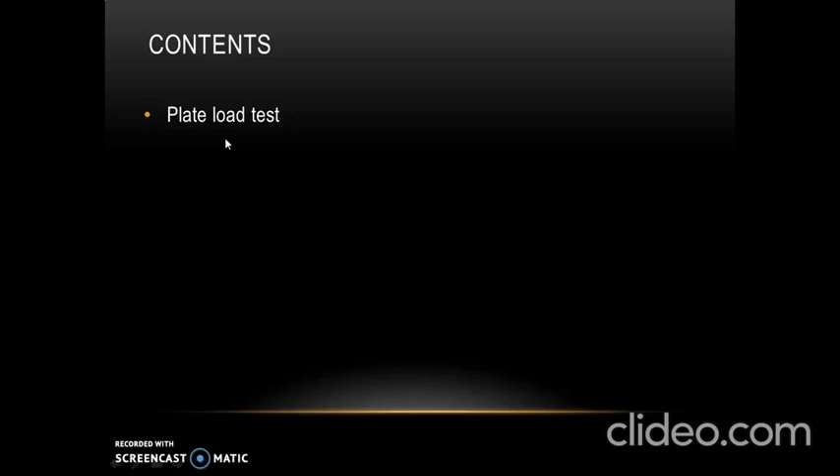In this presentation, we will learn how to find out the ultimate bearing capacity, safe bearing capacity, and also the settlement of the foundation using plate load test. Plate load test can be conducted by using gravity loading method and truss loading method.

In this figure, we can see a test bed of width 5 times BP, where BP is the width of the test plate. There are two dial gauges which are fixed on either side in order to measure the settlement of the plate. And at the center, there is an extension pipe over which a hydraulic jack is fixed in order to note down the application of pressure. Above the hydraulic jack, there is a steel girder which supports a loaded platform made up of sand

bags. Using this test, the load or pressure applied onto the plate will be noted down and the corresponding settlement will be noted with the help of the dial gauge. This is the plan for the same setup.

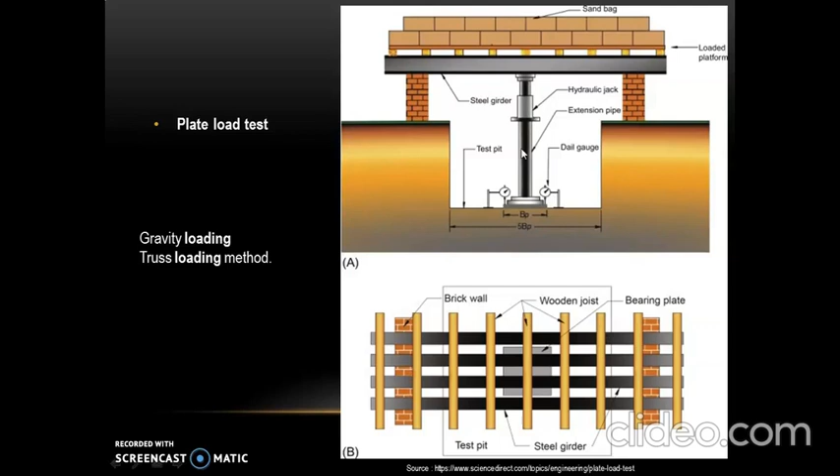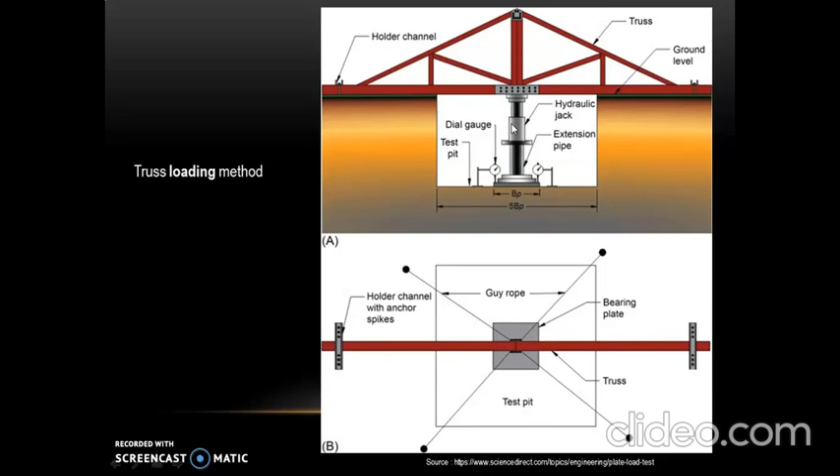Next is the truss loading method, in which instead of sandbags we can see that the truss is being used in order to apply the load. Test bed is of size 5 times BP, where BP is the width of the test plate. There are two dial gauges in order to measure the settlement. Hydraulic jack is used to apply the load. And this is the plan for the same setup.

In plate load test, a square or circular rigid plate of standard dimension, generally 300 mm square for square or 300 mm dia for circular, is placed at the foundation level and load is applied in increments. The settlement of the plate corresponding to each load increment is recorded for calculating bearing capacity of the soil.

The plate load test, which is used to determine bearing capacity and settlement, may be carried out by either using a gravity loading or truss loading method. A test pit of the same depth as the foundation and width equal to 5 times the size of the bearing plate, that is BP, is dug into the ground.

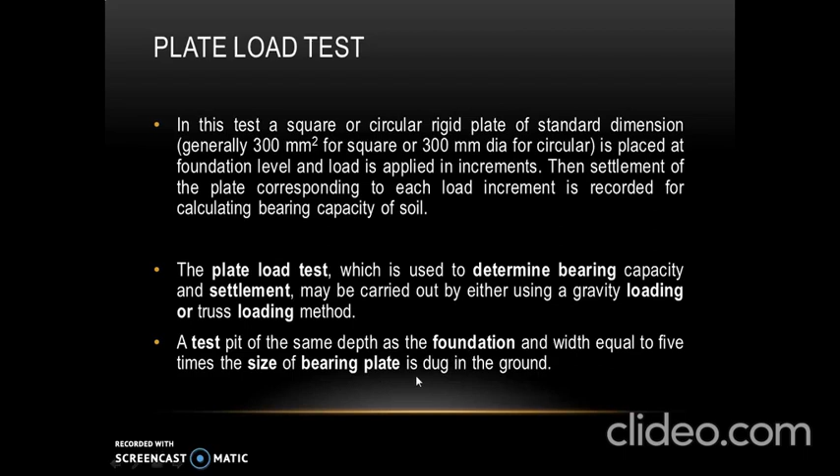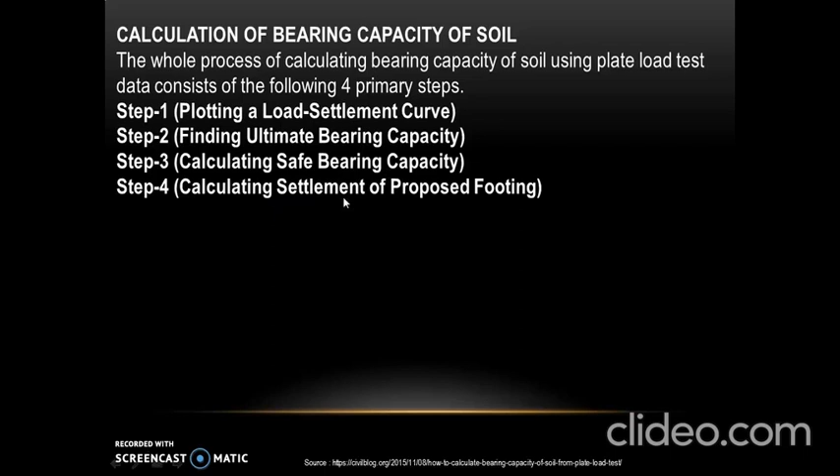Now we will find out how to get the value of bearing capacity of the soil and also the settlement of the proposed footing. The process of calculating bearing capacity of the soil using plate load test consists of 4 steps. First one is to plot the load versus settlement curve. Second one is to find ultimate bearing capacity, and by knowing ultimate bearing capacity, we will be able to calculate safe bearing capacity. And even we will be able to calculate the settlement of the proposed footing.

First step is to plot the load versus settlement curve. After performing the plate load test, we need to plot the load versus settlement curve as shown here in this figure on the arithmetic scale. Pressure will be marked on x-axis, which will be usually in terms of kilonewton per square meter, or here it is shown in terms of kg per square meter. And corresponding settlement is shown on y-axis, which is in terms of mm.

Depending on type of soil below the test, the load settlement curve can be of 4 different types. So here in this figure we can see 4 curves are drawn for 4 different types of soils. The first one is curve A, which is obtained for loose to medium cohesionless soil, which will have the value of N between 15 to 30. But for this type of curve, there is no clear point of failure.

Next is curve B, which is usually obtained for cohesive soil, and we can see that with the increase in load, the curve leans towards the settlement axis. Here we will be able to get the failure point very clearly. Next is curve C, which is obtained for partially cohesive soil, that is c-phi soil. In this type of curve also we cannot see a clear point of failure as in the case of curve A.

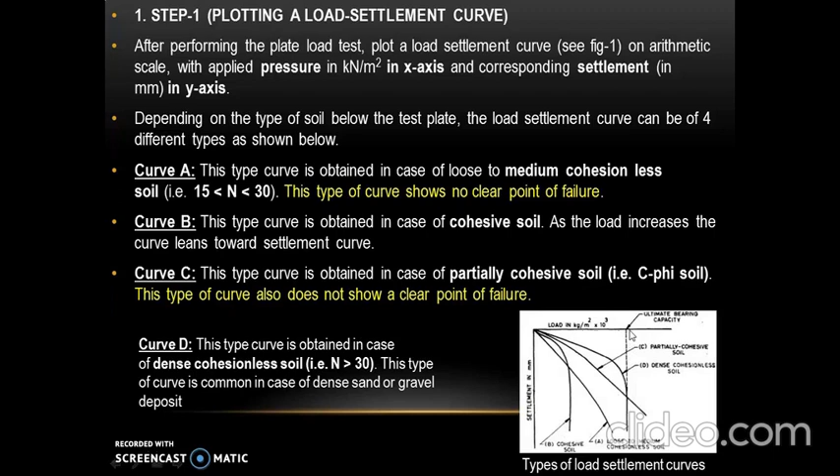So here for curve B and curve D, we will be able to obtain ultimate bearing capacity without much difficulty. Whereas for curve A and for curve C, we cannot obtain the failure points. Hence it is difficult to get the value of ultimate bearing capacity. For B and D curve, even we can join the two tangents, and once we project the intersection point on x-axis, we will be able to get ultimate bearing capacity.

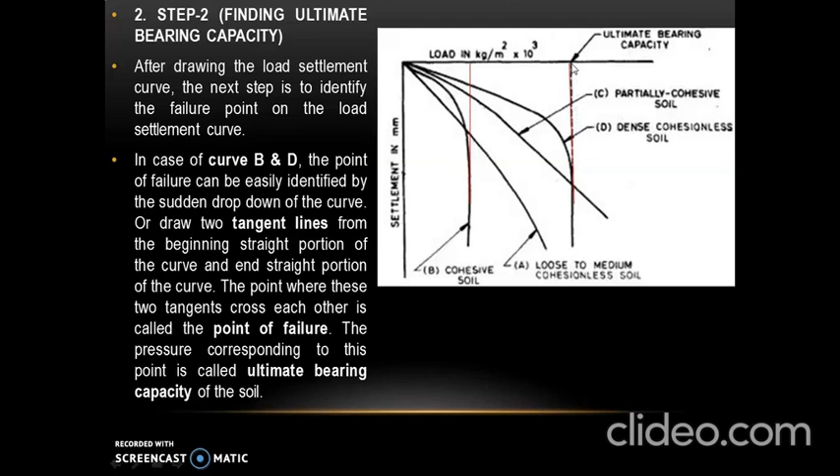So either we can project the failure point on x-axis to get the ultimate bearing capacity, or we can draw two tangents from the straight line portion, and later the intersection point has to be projected on x-axis to get the ultimate bearing capacity.

Now for curve A and C, it is difficult to find the clear point of failure on load settlement curve. So to overcome this problem, a scientist called De Beer introduced another method of drawing load settlement curve. According to his method, a log chart is plotted with settlement on x-axis and pressure on y-axis.

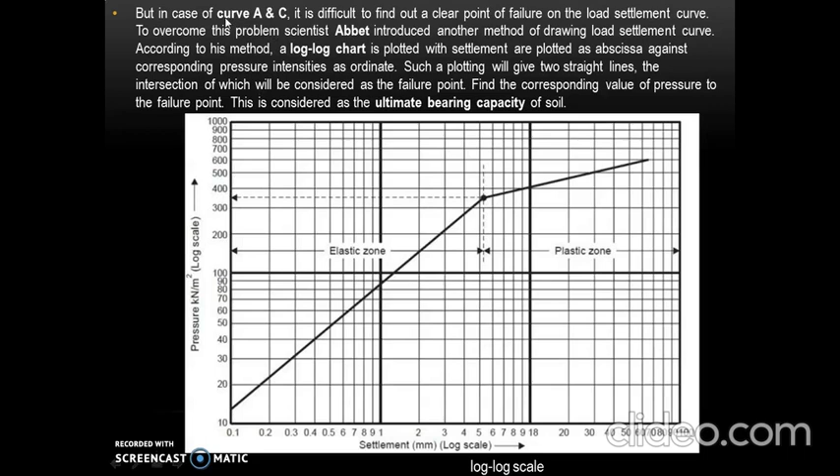So once we plot, we will be able to get two straight lines, and the intersection is considered to be a failure point. Next, we have to find the corresponding value of pressure to this failure point, and this pressure indicates the ultimate bearing capacity of soil. So this is the method of obtaining ultimate bearing capacity for A and C type of curves.

Next is to calculate safe bearing capacity. Safe bearing capacity will be equal to ultimate bearing capacity divided by factor of safety. We have already seen how to find ultimate bearing capacity for B and D curves and also for A and C type of curves. Once we know ultimate bearing capacity, we can divide it by factor of safety to get SBC. Here factor of safety can be assumed as 2, 2.5 or 3 depending upon the site condition and importance of the structure.

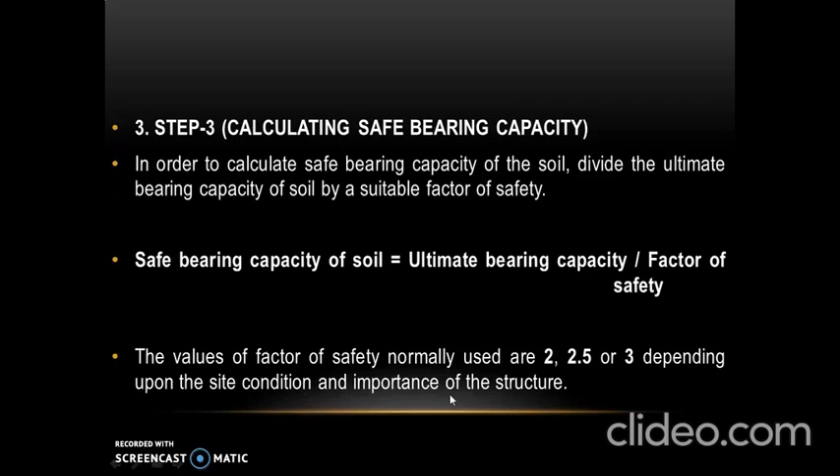Now we will find out how to calculate settlement of proposed footing. The formula suggested by Terzaghi and Peck is used to calculate settlement of footing for granular soil. The formula available is SF, that is settlement of footing, equal to SP, that is settlement of plate, into [B, where B is width of foundation, into (BP, that is width of plate, plus 0.3)] whole divided by [BP, that is width of plate, into (B, which is width of footing, plus 0.3)], the whole square.

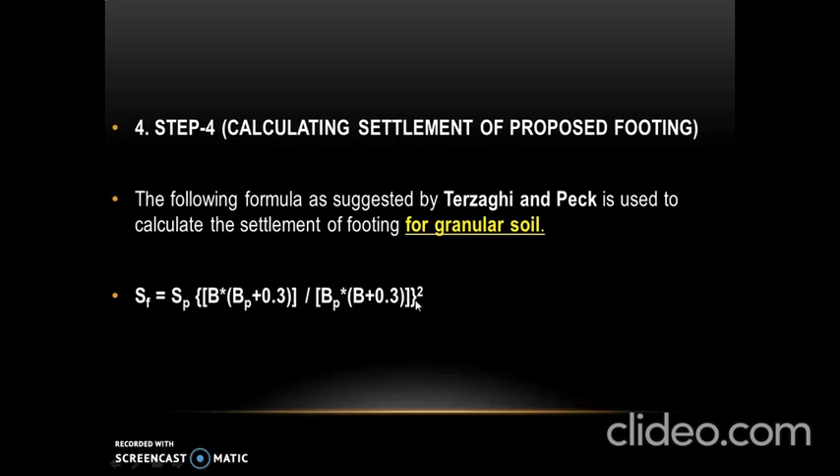And for clay soil, the equation used is SF equal to SP into B divided by BP, where SF is settlement of footing in mm, SP is settlement of plate in mm, B is width of footing in meter, and BP is width, or dia of plate in case of circular plate, and unit is in terms of meter.

For calculating settlement of a given size of foundation subjected to a given load, we need to calculate corresponding intensity of loading by dividing the load by the area of footing. So pressure is load divided by area. That is, intensity of loading equal to load in terms of kilonewton divided by area in terms of square meter.

Then from load settlement curve, which we obtain by using the test results of plate load test, we can find out the plate settlement corresponding to the calculated intensity of loading, and later we can use this value of settlement in the formula to get the value of settlement of footing. So this will be more clear once we solve the problem, but as of now we need to know the procedure for finding the settlement of the footing.

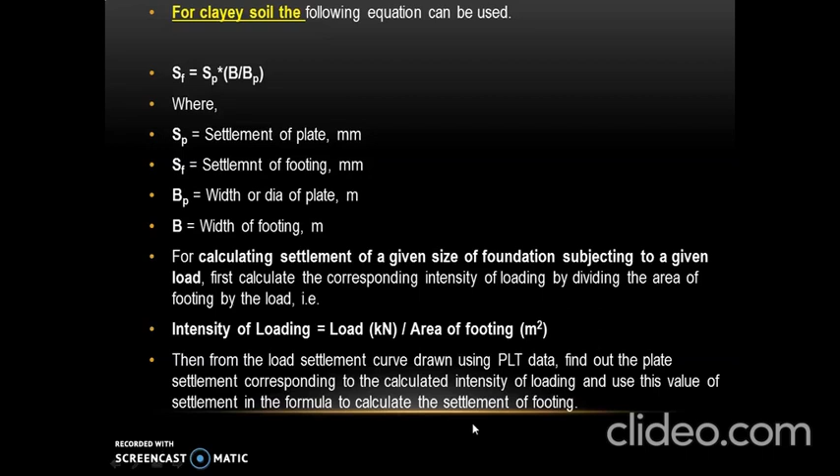Now we will solve a problem to find out the safe bearing capacity and settlement of square footing. A plate load test was conducted using a plate of 0.75 meter by 0.75 meter size on a uniform deposit of sand, and the data obtained are tabulated here. The pressure in terms of kilonewton per square meter is noted down, and corresponding settlement in mm is shown over here. The pressure ranges from 0 to 600 kilonewton per square meter, and corresponding settlement ranges from 0 to 40.6 mm.

With these values, we need to calculate safe bearing capacity of soil, considering factor of safety as 2.5. And also we need to find out the value of settlement of a square footing of size 2 meter by 2 meter at safe bearing capacity.

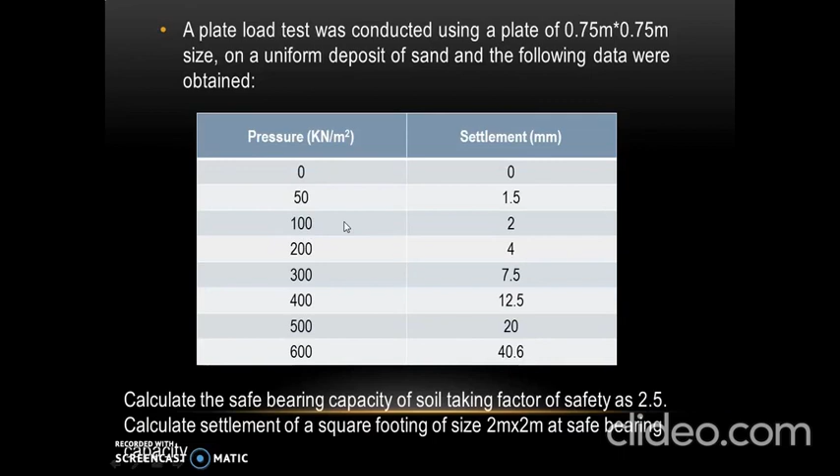To begin with, we will draw the load versus settlement curve with the data given in the table. So for first value of pressure, 0, the value of settlement is 0. Next, for pressure 50, the value of settlement is 1.5, so we plot that. Next, for 100, the settlement value is 2. Similarly, plot the rest of the points. Later on, join all the points with the help of smooth curve.

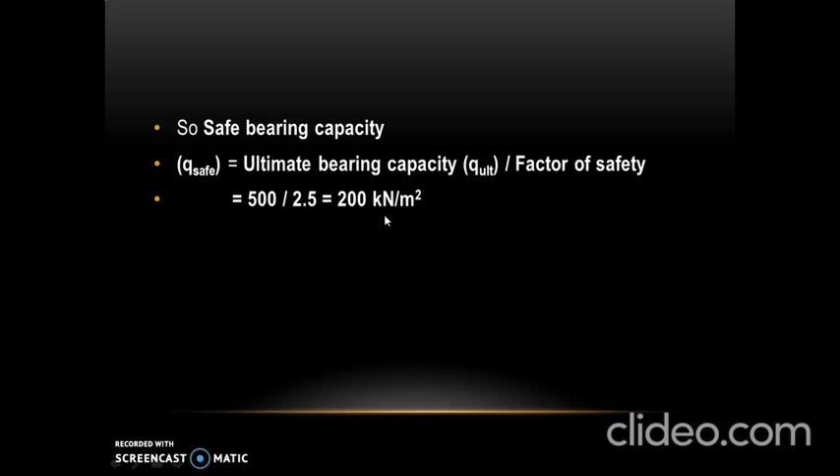Now we will find out the footing settlement. For that, the given values are width of the footing, that is B equal to 2 meter. Width of plate used for test is 750 mm, that is BP. In terms of meter, it is 0.75 meter. Plate settlement we obtained from the graph as SP equal to 12 mm.

So settlement of footing at safe load can be calculated using the formula SF equal to SP multiplied by [B(BP + 0.3) / BP(B + 0.3)] the whole square. This formula is to be used for granular soil, and in the problem it is mentioned that the soil is granular, that is sand.

Now we will substitute the values. SP is 12 mm, B is 2 meter, BP is 0.75, plus 0.3, divided by BP 0.75, B is 2 plus 0.3, the whole square. So now the value of SF after calculation, we get it as 17.78, which can approximately be written as 18 mm.

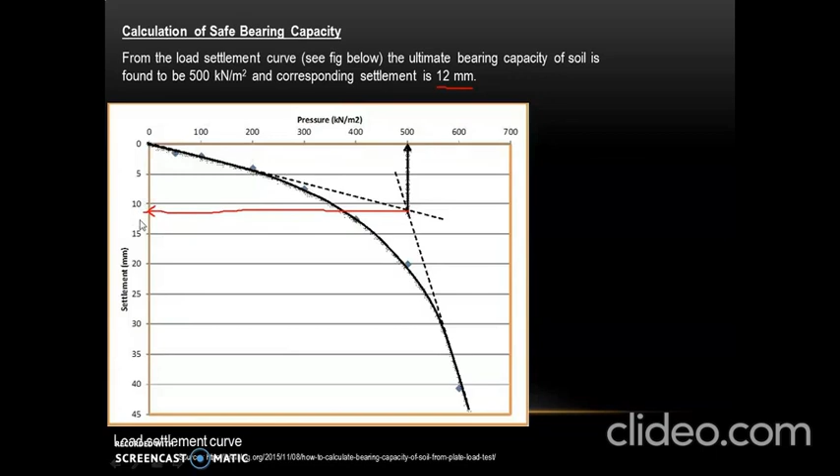So we have found out the footing settlement by calculating the value of SP, that is 12 mm, using the load versus settlement curve. From the load versus settlement curve, we had got settlement of plate as 12 mm, so the same value is used in this equation to get the value of footing settlement.